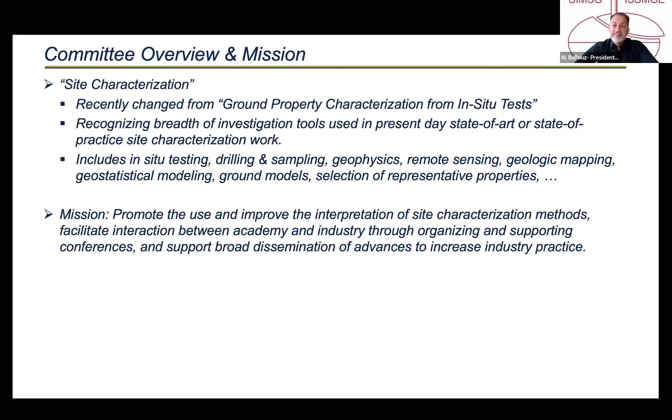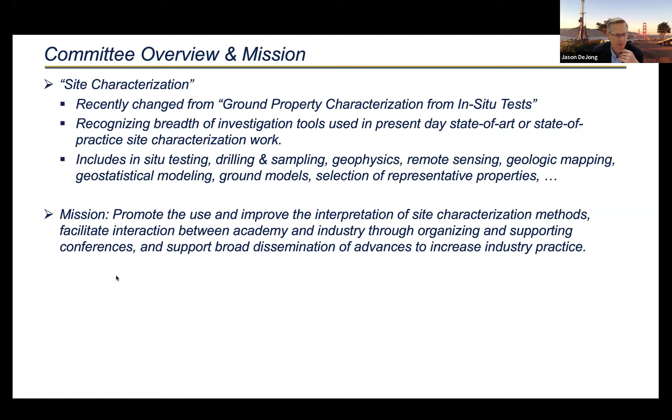So we're really trying to promote both the use and improve the interpretation of site characterization methods, facilitate interaction between academia and industry, and really try to push and provide access out into industry. I'm the chair of that committee, Paolo Monaco out of Italy is the vice chair, and Marcos is secretary. We have a number of members, 83, but we're always looking for more people who are willing and interested in being actively involved with our variety of activities.

Those activities are numerous, but I would say our committee is highlighted with respect to the number of meetings we help organize and host. Just a snapshot of some of those coming up: we've had two recently in the past year, there's a Measurement While Drilling conference, an online conference in a couple of weeks.

Obviously we're participating in the ICSMGE next June in Vienna. There's an In Situ conference in Bali later next year. The following year is CPT'27 in Vancouver, and the 8th International Conference of the ISC is going to be in Cape Town, South Africa in 2028. So there's a number of activities that provide opportunities for academics and industry to come together, share ideas, and collectively help advance the field.

I wanted to provide a comment and context about the selection of design values. Really, it's a critical component of developing a project-specific site model, developed based on site characterization tools. We need to understand the geologic formation process. We want to reflect best estimate values as well as a broad range, which is what we'll be talking about, and it needs to be a transparent process that's easily reviewable.

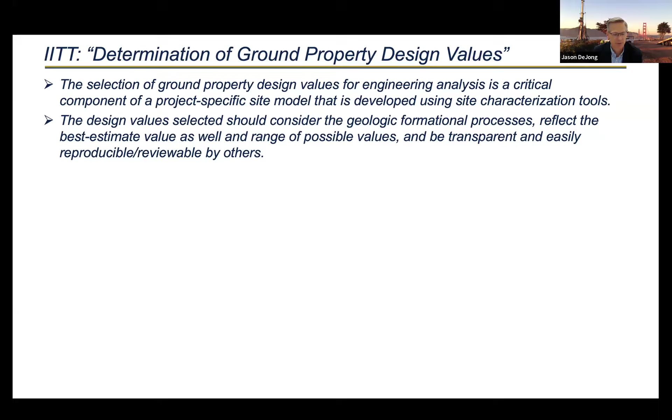So I like this figure from a project site where they're building an embankment dam. You can see here a vertical cut of about 10 meters, and what's beautiful about this is you can see all these thin layers and fingerings in all these different places of all these different soil types.

And if we did one sounding on the right-hand side and another sounding on the left-hand side, maybe we would encounter the same layer at this location over here on the left and over here on the right, and we might assume those were connected if we couldn't see in between. But in fact, they're not. The subsurface is tremendously variable due to its depositional process.

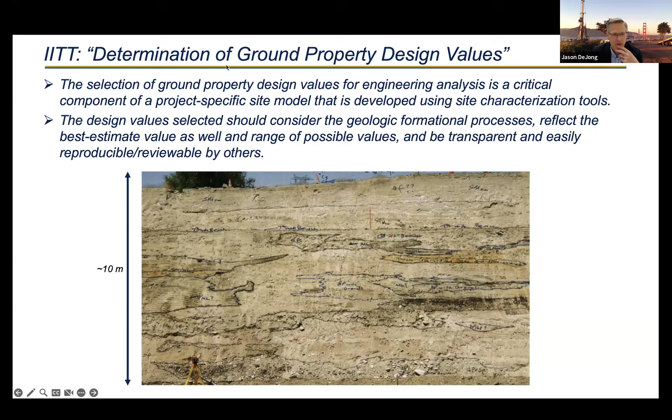So the question becomes, if this is what we're trying to design for, but we have very, very limited data, how do we do that? That's really the underlying question, the underlying theme about what we're trying to get a hold of and think about. So hopefully that sets the context a little bit. I'll pass it over to Jose, and feel free to take it from here as we begin to delve into the process to systematically select design values.

Okay, thank you, Jason, for this opportunity to share my experience with Eurocode. Let me share. Jason, that was very short and very powerful.

I have more slides. Scary at the same time with the section view. That's the reality, how much we don't know. We only sample. It's the first time somebody shows what we don't know instead of showing what we know. I like it. The question is, how much do we not know? We actually are over-optimistic, I think, in our understanding of the subsurface. The mystery is much greater.

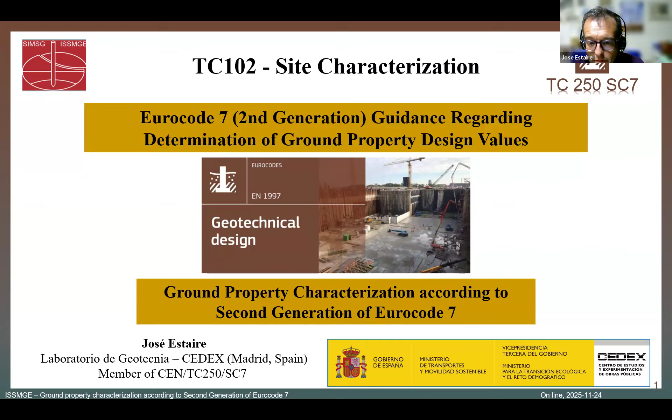Julia and I are going to show you what the second generation of Eurocode 7 says about this. Good afternoon, my presentation is about ground property characterization according to the second generation of Eurocode 7. Let me begin talking about the second line of the title, second generation of Eurocodes.

Eurocodes, for those that don't know, are a suite of 13 documents that establish principles and requirements for safety, serviceability, robustness, and durability for the design of buildings and civil engineering works. Among these documents, Eurocode 7 is the one devoted to geotechnical design.

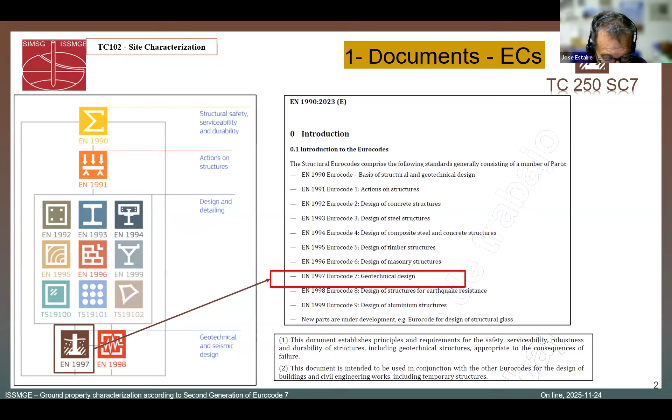The second generation of Eurocode 7 has 3 parts. Part 1 sets the general rules for the design and verification of geotechnical structures. Part 2, devoted to ground properties, gives provisions and guidance for planning ground investigations and sets rules for determining ground properties, mainly based on field investigations and laboratory tests. Part 3, geotechnical structures, provides specific rules for structures such as foundations, retaining structures, or even some new topics about ground improvement works.

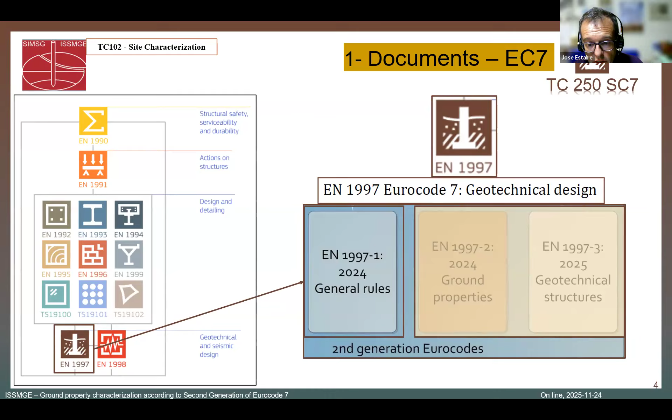Now let's focus our attention on Part 1, since part of its content is directly related to the topic of this seminar. In the following slides, we are digging into Part 1 to find the specific contents we want to explain. So let's begin with Part 1 and its table of contents, in which we can see clause 4, basis of design, devoted to the principles of this design.

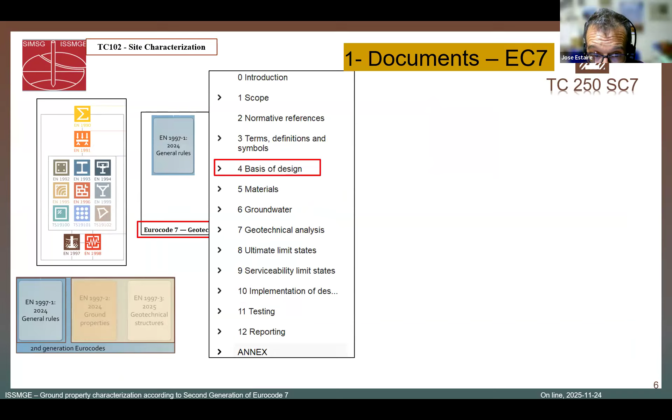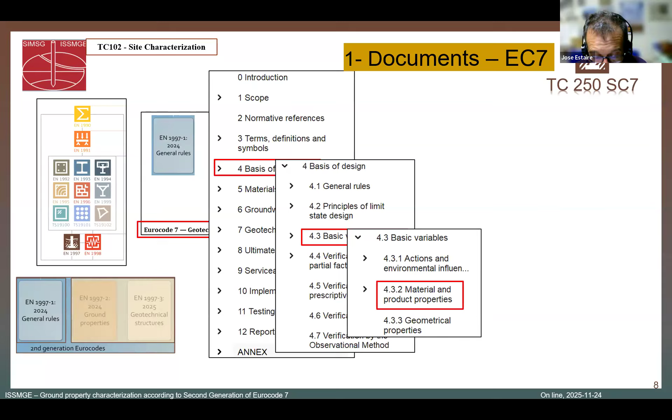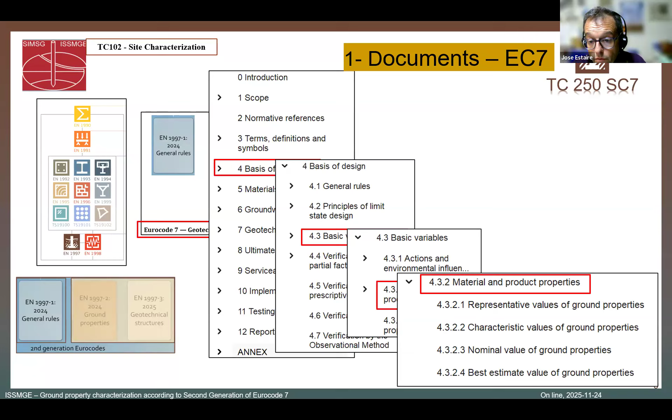And going on, section 4.3, basic variables, and finally we arrive at point 4.3.2, material and product properties, where we can find these paragraphs that describe different concepts about ground properties, representative values, characteristic values, and nominal values, which constitute the main topic of both Julia's and my presentations.

However, I don't want to lose the opportunity to present this JRC guideline, determination of representative values from derived values to verify limit states according to Eurocode 7, since it explains many of the concepts that Julia and I are going to develop during our presentations. It's a guideline edited by JRC, drafted by a group of people led by me, and where Julia plays a very important role.

It can be freely downloaded from the JRC webpage, and you can see here its table of contents. And here the relation between the content of this guideline and the previous point I mentioned. I have also added Annex A from Part 1 of Eurocode 7, characteristic value determination procedure, because it's very important for what Julia is going to explain later.

So now let's go to the core. Yes? Sorry to interrupt, but is this ongoing work or is it finalized? No, it's finalized. We have a final version of Eurocode, so yes.

People can open the link and see, use it for guidance. Yes, this guideline was finalized at the beginning of this year, after almost 2 years of work in this task group, and now it's finalized. I think it is very valuable to better understand what we are going to explain in these 10 minutes plus 10 minutes presentations of today. And was it done in an electronic format, application, or just a document PDF, just to tell everyone? Yeah, it's a PDF document, downloaded from the webpage. We will let ChatGPT go look at it. Yes, to make a summary of that. Yes.

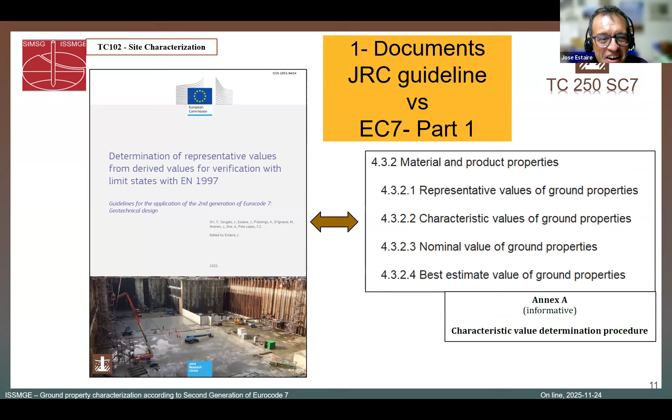Before entering the core of my presentation, I want to show you this little flowchart, because it's my interpretation of the process, the different tasks in the design of the geotechnical structure according to Eurocode 7. According to my understanding, this process has 5 main tasks.

Task 1: reliability assessment and management; ground investigation and modeling; design verification; design implementation during execution; and reporting. This is related to what Jason said previously about the transparency of the whole process. All these tasks have their own report in which the designer develops the work done during the design.

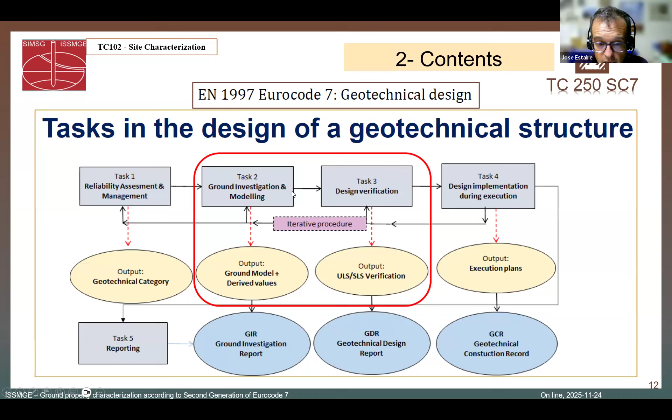What we are talking about today represents the last step of task 2 and the first step of task 3, design verification. So it's in the middle of these two tasks. That's why I put it here, only to frame the activities.

Let me begin by reading the first point I previously presented, because I think it's a good summary of what we are talking about. Representative values of ground properties, used in limit state verifications, shall be determined from derived values presented in the ground investigation report.

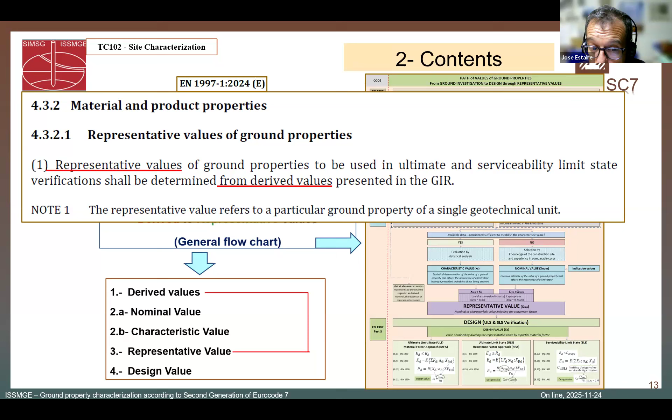That means that according to Eurocode 7, a value should follow a path from the moment it's taken during the ground investigation activities to the moment the designer uses that value in the design and verification of limit states.

This path can be summarized graphically in this flowchart, which goes from derived to representative values, from ground investigation to design, passing through another concept that I'm going to explain.

But before explaining this flowchart, I also want to read the note: the representative value refers to a particular ground property of a single geotechnical unit.

Think of a slope in which we have identified 2 or 3 layers, let's say geotechnical units, in terms of the vocabulary of Eurocode 7. If we want to perform an overall stability analysis, we need at least the cohesion, friction angle, and weight density of each of these layers. Each of these ground properties belongs to each of the geotechnical units.

So now let's go to the flowchart, beginning with the upper part. As usual in all geotechnical works, we begin with the ground investigation.

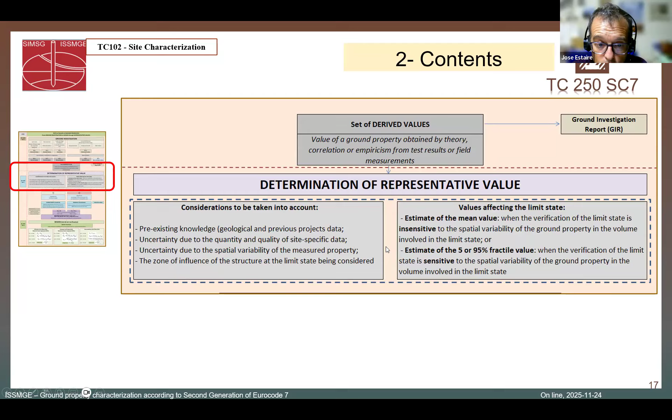Also, looking at the right part, the ratio between the spatial variability and the length of the surface is an indication of what value affects the limit state, as Julia is going to explain later. These two groups of ideas are very important in the determination of the representative values.

So now, coming back to our set of derived values, the designer has 2 paths to obtain the representative value. One is using statistics as a tool to calculate a value, termed the characteristic value, to distinguish it from the other path, in which the designer, instead of using statistics, uses engineering judgment as a tool to select.

In this case, it's a more subjective process than the other one. That's why we have preferred to use the verb 'select' instead of 'determine' or 'calculate'.

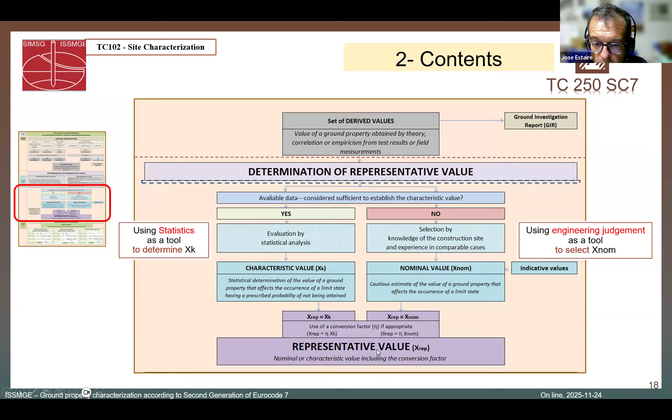The designers can also use both, as recommended in that JRC document. But in this moment, the designer has either the characteristic or the nominal value, or both, and it is in their hands to decide which representative value to consider. So the representative value is determined through these two ways or paths.

Now the last step is to use these representative values in the design process, in the limit state verifications. According to Eurocode 7, there are two approaches. In the material factor approach, the designer calculates the resistance using the design value, which is the representative value divided by a partial factor of materials. In the resistance factor approach, the resistance is calculated directly using the representative value, and then the calculated resistance is divided by a partial factor on resistance.

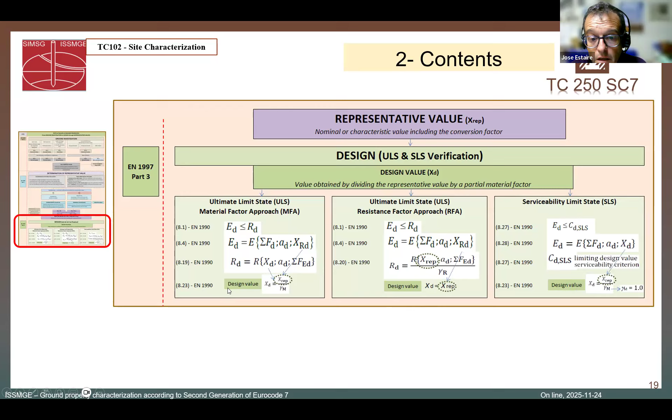If we are in the serviceability limit states, we use the design value directly, but in these cases the material factor is equal to 1. So this is the end of the procedure set in Eurocode 7 to determine the representative value and to use it in the design process.

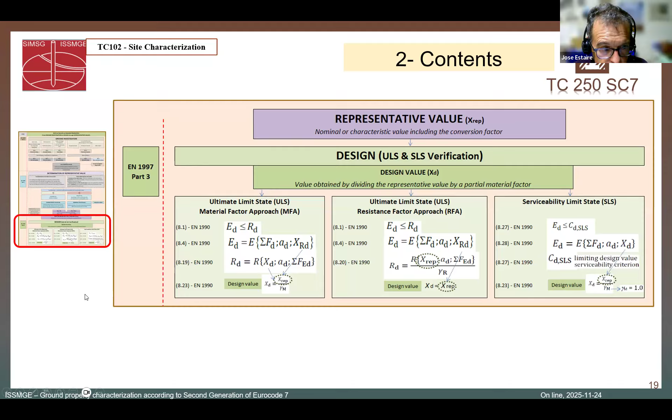Jose, can I just ask a couple questions? This flow chart on the left is really good. If you go back up a couple slides to where it covers the top part - I'm curious, in the guidance, is there clear delineation regarding the separation of what is factually generated in the laboratory or field versus the point where we really start exercising judgment?

In the case of trying to reconcile values, I follow through most of this, and you have to use some methodology to interpret the data - as you showed, going from a shear test to c' and φ'. If you're using CPT data, you can go through to QT, and that is a factual, mechanical equipment-based process of data reduction.

But then we have a choice, a step, in selecting strength values for a clay layer, and now I have several different correlations. At that point, when engineers start selecting, they're starting to insert judgment, because they're choosing between different correlations to try to estimate strength. As a reviewer, particularly on larger projects, it can be very important to separate where the facts by themselves end, and where you start inserting judgment, with documentation of that judgment and the justification behind it.

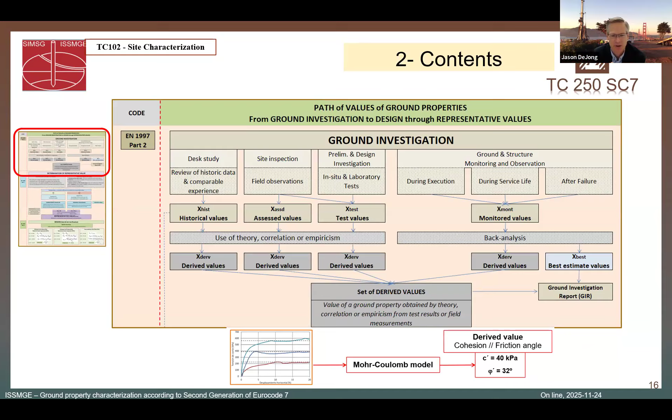So in peer review, or if every 5 or 10 years a critical structure has to be re-reviewed, you have great transparency of how that works. So I'm curious about your thoughts with respect to this in particular.

Let's say this upper part of the flow chart is very related to part 2 of Eurocode 7, the ground investigation. And when we jump from part 2 to part 1, it's where engineering judgment begins, although, as you mentioned, in the determination of the derived values there are also some theories or correlations used.

Some countries, according to another idea, according to this paragraph - you see that derived values are presented in the ground investigation report. The ground investigation report in some countries - Eurocode 7 now opens the possibility that for some countries the ground investigation report is factual, but for other countries it should have some interpretation. So it's not clear.

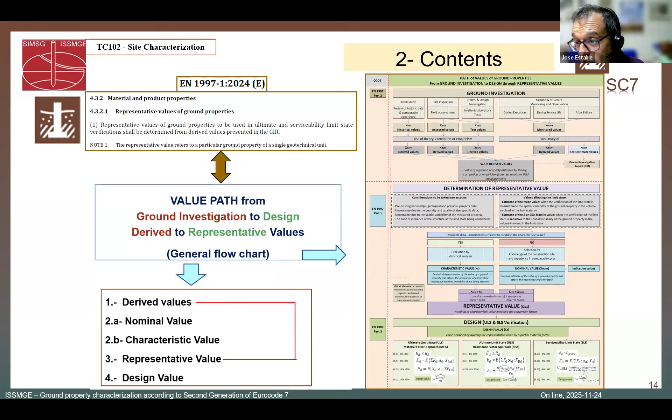Julia is going to talk about this, and also let me mention this guideline in chapter 5. We titled it special topics, but perhaps it's not so special. There is some section about how to determine the representative values when there are different sources of information.

Yeah, nice. Okay, thank you. We need many hours or many days to go through the details. Yeah, I know. This is excellent, though. This is guidance anyone can use anywhere.

This is a summary, Jose. Is there in the guidance some recommendation to store the data in a data format for future use, like AGS or other data formats? Does it mention anything about that? No, it's not mentioned in this guideline.

There is another guideline, one of a set of four guidelines, called ground modeling. In that guideline, there are some ideas about this, what you are saying. Let's keep going.

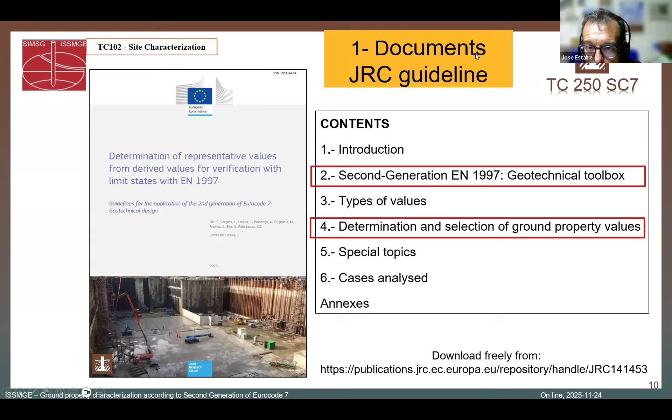Thank you. Thank you, Jose. Thank you. Go ahead. I'll stop sharing. Okay, so I guess it's on me to share now. The floor is yours, Julia.

All you need to do is teach us how to do all of it. That's it.

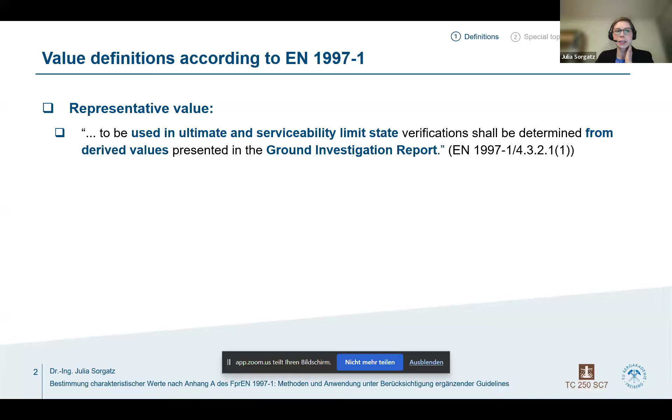I guess we'll dive a little bit deeper into Eurocode 7 part 1. As Jose already introduced, there are different types of values in Eurocode 7 part 1, and he already introduced the representative value, which is used in ultimate and serviceability limit state, and it's from the ground investigation report.

Then we have this nominal value, which is a value fixed on a non-statistical basis. That's the engineering judgment value, as you may remember. And it should be selected as a cautious estimate of the average, inferior or superior value.

But what's more interesting for us in the next few minutes is the characteristic value. This is derived based on a statistical determination of the value of a ground property. Now we're going to check how the statistics look like.

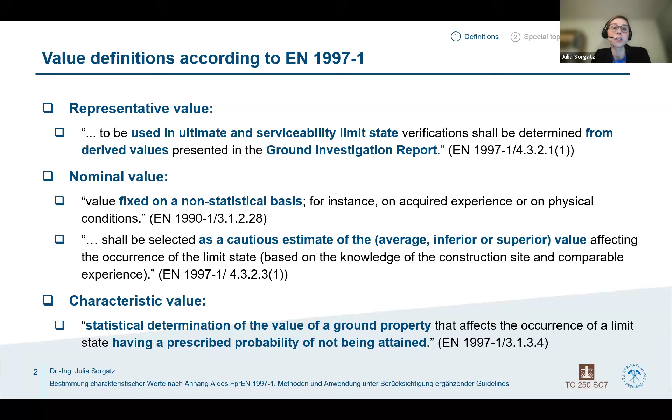And then we can calculate the characteristic value by using the mean value of all our ground properties. And then we have something that's called a statistical coefficient, the coefficient of variation, which is the standard deviation divided by the mean of our ground property.

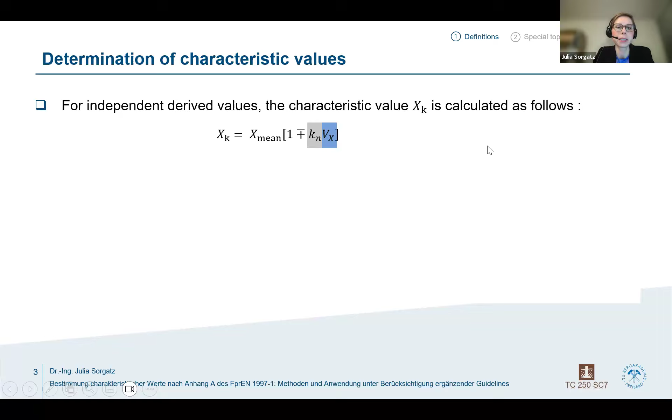Eurocode 7 makes things—I wouldn't say complicated, but you have to understand it once. There are different types of estimates, very much related to the averaging of the ground properties, but we'll come to that in a minute. So we have something called a type A estimate, and this is basically the estimate of a mean value.

And then we have something that's in between, something between the mean and the 5% fractile usually. There we have a very specific value, which is the large gamma squared, and this is a factor that accounts for the spatial averaging.

Then we also have two different cases: case 1 and case 2, which reflect our knowledge on the coefficient of variation. So Vx known and Vx assumed means we have some information on our variability in the ground, whereas case 2 means Vx unknown, so no knowledge on the variability of the ground.

In this case, we use the student T distribution for the Kn value instead of a Gaussian distribution. The student T distribution is a little bit more conservative, so it gives you, in the end, lower characteristic values.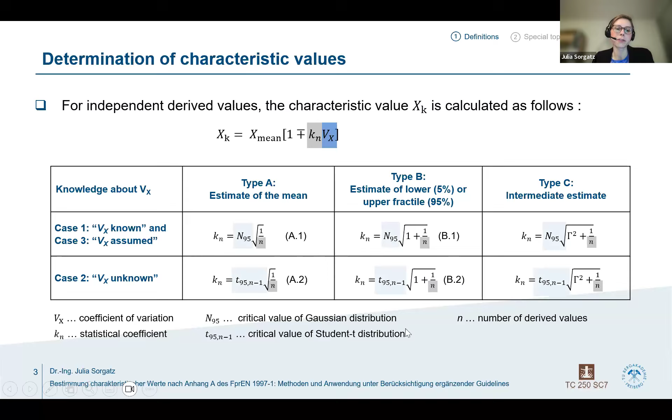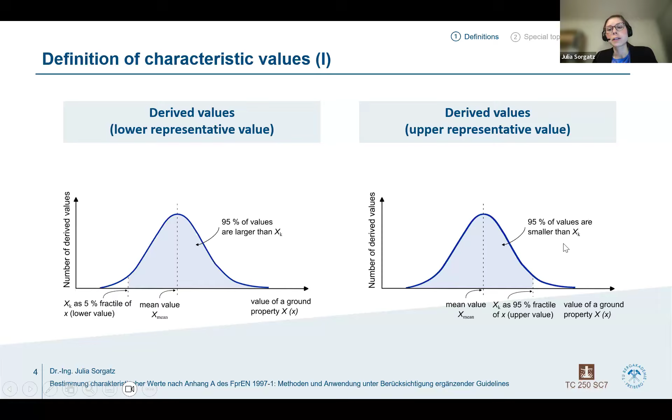So we have the different values as mentioned, and always the number of samples or derived values that needs to be included in our definition. To show what this means: here is our distribution of ground properties. When we have a 5% fractile value, a lower value, it means 95% of our values are larger than the characteristic value we determine with our equation. And if we have an upper characteristic value, then 95% of our values are smaller than it.

Then we have this spatial averaging concept. When we have a type A estimate, it means we are calculating the mean, and for that we need a lot of spatial averaging. The ground properties on our failure surface, as with the slope example, need to average out over the failure surface, so we get closer to the mean and our distribution gets smaller. This is the type A estimate.

Then we have the type B estimate, where we estimate the 5% fractiles. This is the pile example, where at the bottom of the pile there's only the tip, and there's not really a lot of averaging of the ground properties. So in this case, we would use the type B estimate.

Then we have the intermediate case, which is only described in the guideline that José just introduced, by TC1. The type C estimate means we do have spatial averaging, but it's not full spatial averaging that converges to the mean value. This is, for instance, relevant for strip foundations or foundations in general, where the type C estimate could be interesting.

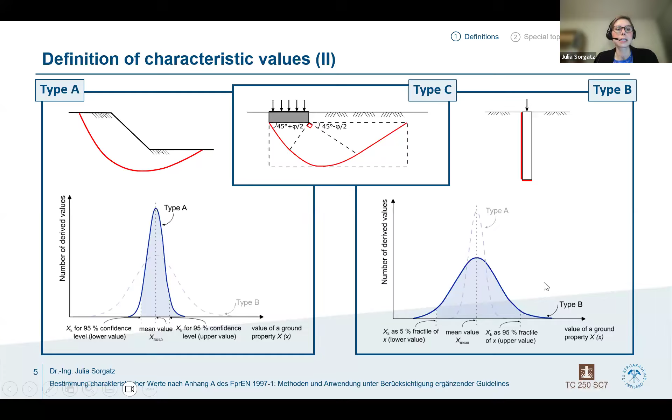We were also already talking a little bit about data, and the Eurocode itself says that when available data are considered sufficient to establish the characteristic value, then the representative value should be determined from this formula. Basically, if the engineer considers that he or she has a sufficient database, then the characteristic value is preferred. But the Eurocode doesn't say what sufficient means, so you have to decide on your own what sufficient data really means for you.

The guideline José introduced a few minutes ago tries to explain what sufficient means, and it also says there's no unique way to select the minimum number of samples, because it depends very much on your application and on the data. When you have a lot of variability in your data, you need more samples than when you have only little variability, and when you have the geotechnical structure in the higher geotechnical category, you also need more data than in the lower category.

But sufficiency doesn't only relate to the number of samples, which is what we would usually expect, it's also related to data quality. If you have triaxial tests, for instance, compared to CPT data, they are of higher quality, and it would be easier for you to define the characteristic value based on the triaxial test data.

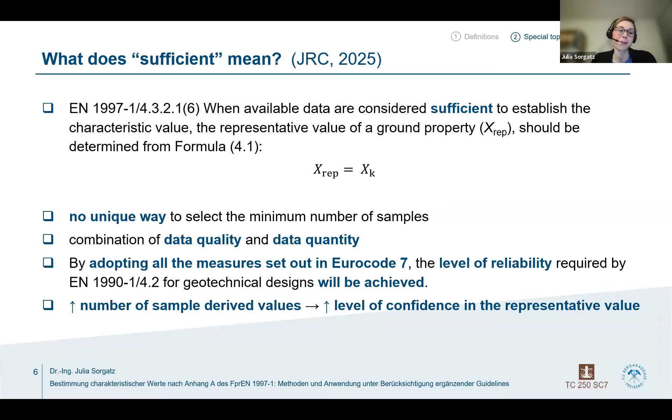The guideline itself tries to give you a little bit of guidance when it comes to the number of samples required, and there are different criteria for selecting the minimum number of samples. As you can see, there are quite a lot of different criteria. You don't have to look through all of them, but the engineer in the end has to decide which criteria would be applicable to his or her application. You can also see there are different numbers of samples involved, like a minimum, but there can be up to 12 samples or even 33 samples required to achieve the target looked into for a specific criterion.

But the guideline also provides examples for this kind of criteria, so you can check how it would work with your use case.

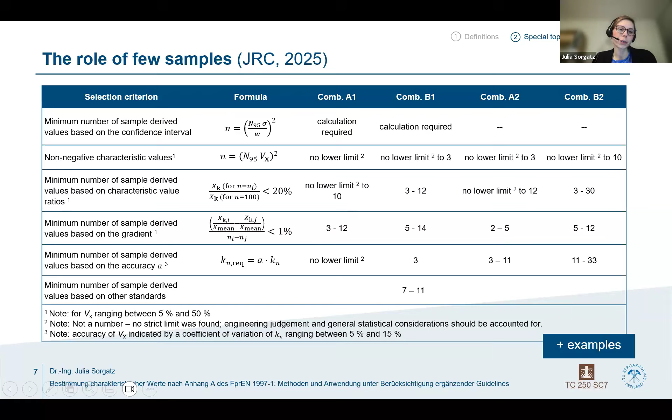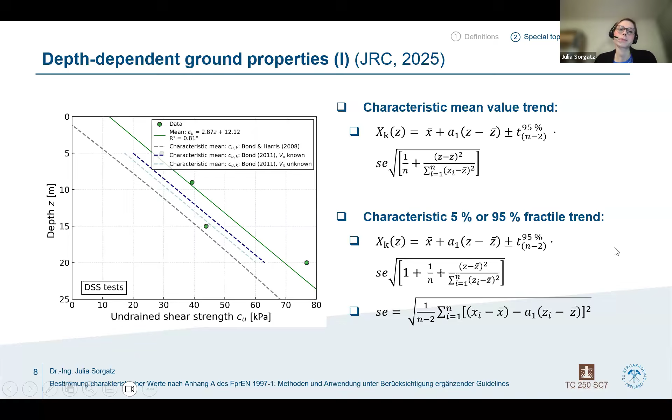Because I brought a lot of numbers, it might be a little difficult to pull up all of them. There's a small example we tried in Germany. It was also a publication with colleagues and me.

We had data from an engineering office with a number of shear tests - direct shear tests, 8 of them. Not a lot, but considering geotechnical engineering, 8 shear tests is still a lot, I would say. They used the data for planning a flood retention basin. For our calculations, we assumed a type A estimate because they rearranged and restructured the soil when they built the basin, so we assumed there was no correlation structure.

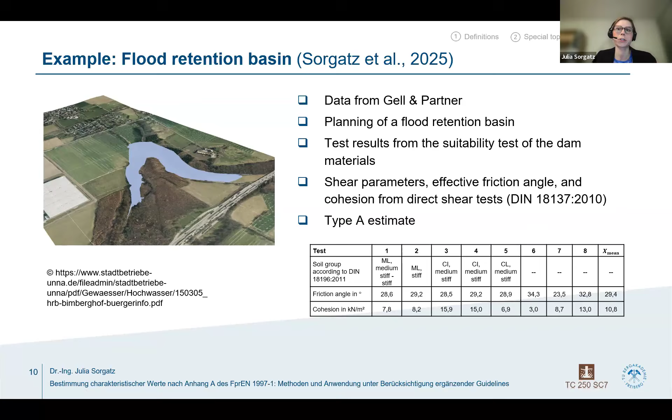In the Eurocode, in Annex A, you can find tables giving rough guidance on the Vx you could expect for your soil type. It's actually not related to soil type, but at least to the ground property. So you can look it up or calculate it from the data, as is done here.

We also compared it to the nominal values given by the engineers and provided for the design, and the values we calculated were quite close to the nominal values provided by the consultant.

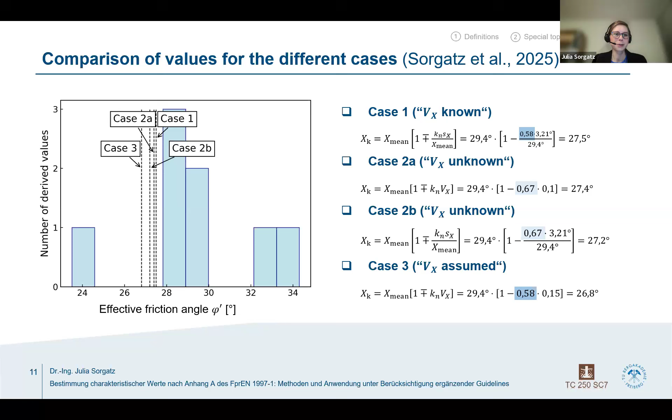So let's recap a few things. The nominal values, as introduced at the beginning, usually reflect many years of practical experience, but they are also determined on a limited number of samples. Usually we can deal quite well, due to our experience, with the uncertainty in the ground. But the statistical methods the new Eurocode, the 2nd generation, introduces allow for a more explicit quantification of uncertainty.

They also make understandable that sample size actually matters - the more samples you have, the better your estimate. You can also estimate how useful additional data can be, how it can help reduce the uncertainty in your data set. There are different documents supporting the determination of representative values, available on European level - the JRC reports - but often there are also national documents currently being worked on, so there will be a lot of guidance on how to select representative values.

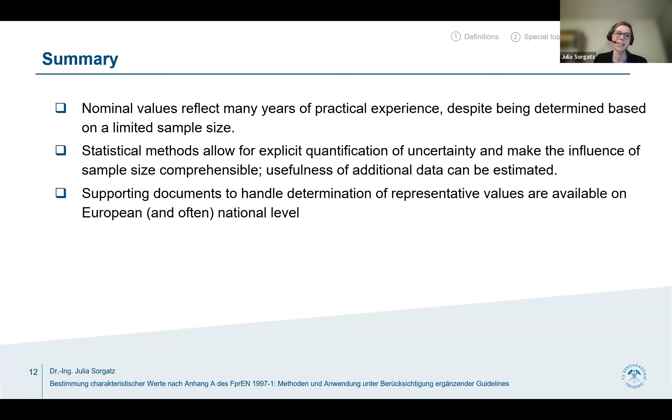I also have to add, since I've only touched a few topics, as Jose already said, the guideline has more information on depth and stress dependent properties, and it also shows how you can combine data from different sources in terms of a nominal value, but also in terms of characteristic and nominal values. So it's really worth having a look into it to get some ideas on how to combine data as well.

Finally, I also have to acknowledge the people who provided data for the example, because it's always a bit difficult to find someone with a lot of good data.

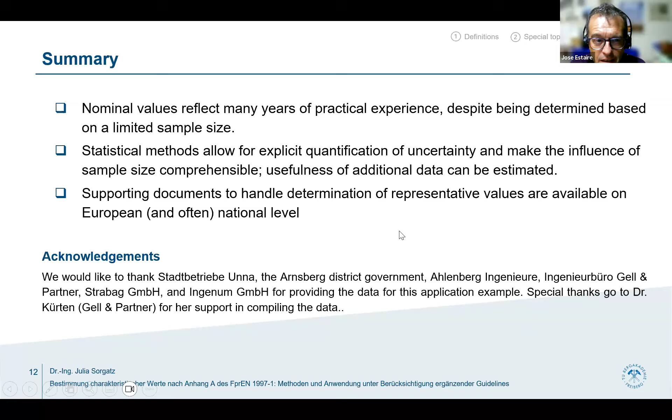I want to link the photograph that Jason showed previously, with these little fingers of different layers, with the ideas Julia showed about these two types of estimation, type A and type B. Because depending on what you are calculating, or depending on the limit state you are verifying, you must select one or the other, depending on the volume of the failure surface you are assuming. I think that's a way to answer what you mentioned during your presentation.

Let me say quickly what I would do, and then maybe open a door to discussion before giving the floor to Henry. In a remote area in Nigeria, when I'm faced with an embankment of a new highway and there isn't enough data, I run sensitivity analyses, though I don't know if it's in the Eurocode 7 recommendation, to see how much the data I'm looking for affects the results. When I find that one item is very important, let's say consolidation behavior, because of time, I ask for that kind of data so it becomes a known Vx. Is there guidance somewhere saying we should run sensitivity analysis instead of wasting time on a value that does not affect the final result of a design?

I'll also talk about how we use the DCPT to determine representative values and move those values to the points where we use them in analysis, maybe to calculate our bearing capacity and then settlement.

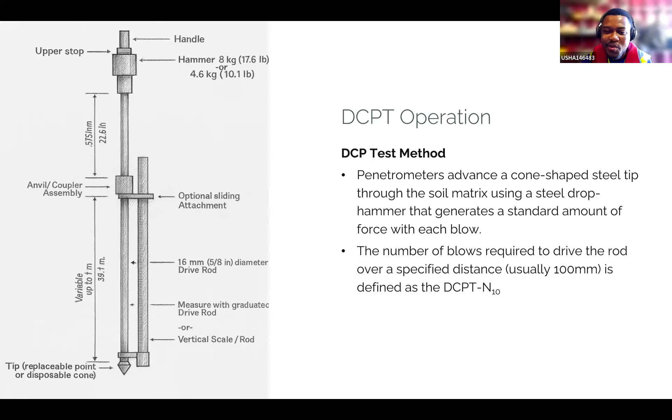Here I have a little sketch of the DCP and how it operates, using a standard hammer that drops over a specified distance. The number of blows required to drive the rod or cone into the ground over that specified distance gives the N value, similar to the SPT, but this is a lightweight one.

In Ghana, there are two main types that are typically used. We have the dual hammer, the 4.6 and the 8 kg, which we typically use for roads, pavements, and cases where we need greater resolution or sensitivity, or where the soil is more sensitive. We also have the 10 kg, popularly called the DIN, which is more used towards shallow foundation design due to the heavier hammer and its ability to go to deeper depths. We are able to drive it up to depths of up to 8 m below the surface.

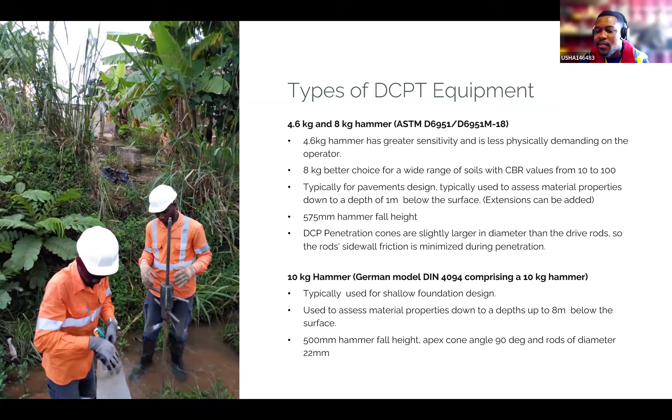Now, the reasons why the DCP is quite popular, and not maybe an SPT or some other type of testing: generally, the DCP is a very cheap or cost-effective means of measuring ground properties compared to other tests, such as running the SPT or even taking samples and running them in the laboratory. So most people would typically tend to go towards the DCP.

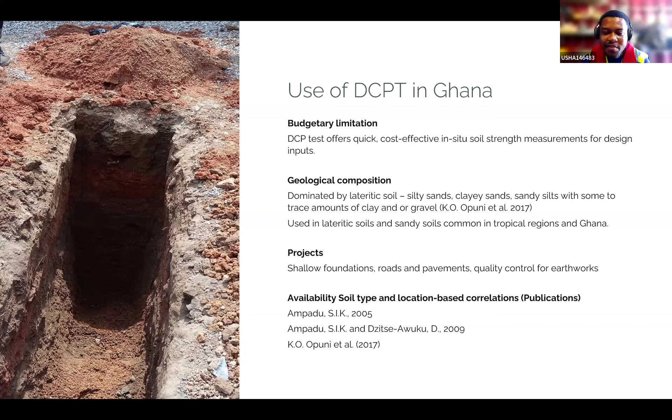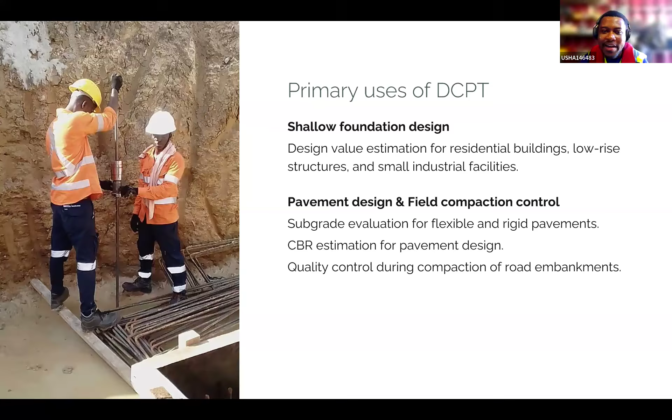So mainly, as I said earlier, it's used for shallow foundation design, pavement design, and field compaction control. Here a group of technicians are using it to assess the degree of compaction in the field, as you can see.

So typically we start from measuring field values, and it's important that you understand the type of foundation or job you are running and choose the right DCP tool. We want the tool to go to depths greater than a couple of feet beyond the depth or width of the foundations we are designing. So it's very important that you select the type of DCP with the depth range applicable for what you are doing.

The second stage has to do with deriving the subsurface properties, where we use the empirical correlations developed by our universities to move the measured values into either CBR, modulus, or friction angle, and then use those for design.

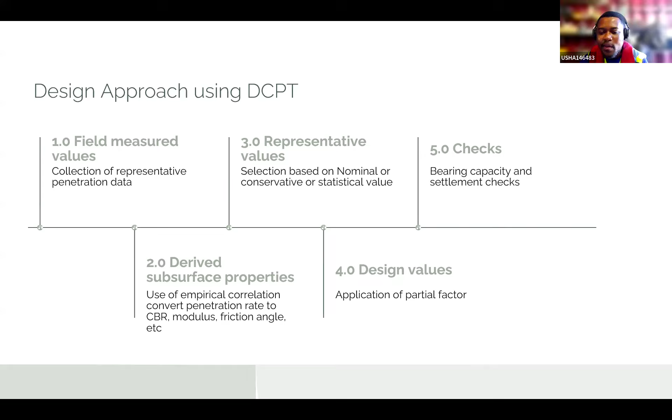The third step, in Ghana mostly, is more of a conservative selection of the representative value. Because the DCP doesn't bring out physical samples for you to actually see what's present, and doesn't take into consideration the moisture content, among other reasons, we mostly tend to stick with a conservative or nominal approach to selecting that representative value to use in design. Then we apply these factors and use those values for the final checks and design.

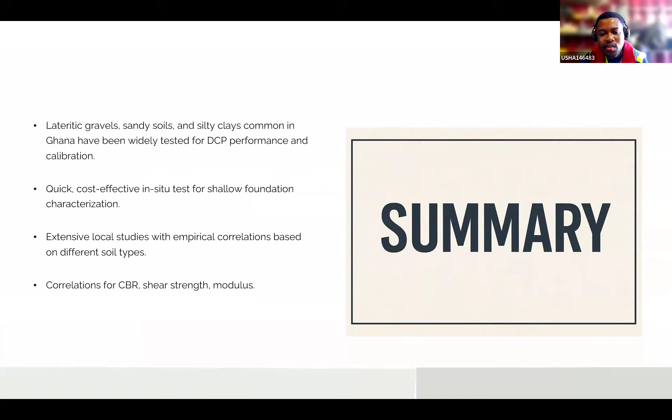So to summarize, I've tried to keep it really short. To summarize and why it's very popular, it's due to our soils, the cost associated with running the DCP in our setting, and the flexibility it gives engineers to be able to quickly mobilize to sites at lower cost. And then there's a lot of work that has been done that has various correlations that allow us to move the measured field values from that point all the way to using it for design.

I also wanted to list some limitations we have when using the DCP in design. The first has to do with the limited depth range it provides. For certain types of foundations, it may not be ideal because the influence area exceeds what the DCP can collect data for. Also, depending on the choice of DCP and the soil properties, you may not be able to adequately determine the composition of the soil. It just gives you some mechanical properties associated with the soil at that point.

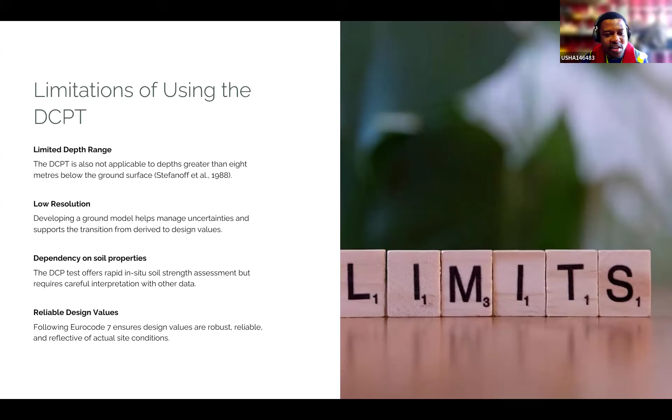And it doesn't provide a good ground model unless you pair it with other tests that allow you to excavate into the soil. And even with those, they are limited because most of the time you use manual labor to do that. The strong dependency on soil properties also influences the DCP. Sometimes the moisture content plays a role and is able to either increase or reduce the skin friction experienced. So these are some references on various works that have been done, and you can find correlations to move the results from the dynamic cone penetrometer and help you for design.

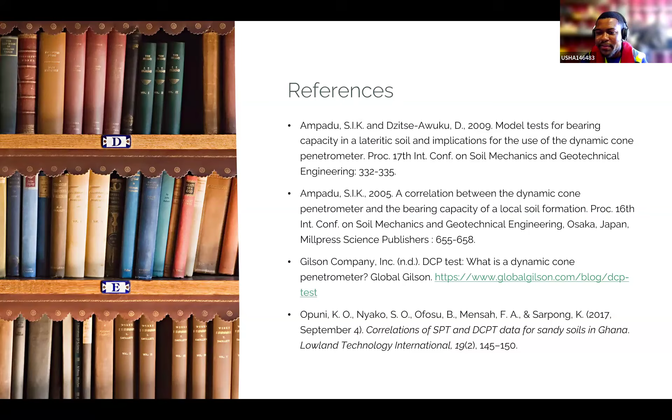Henry, thank you so much. You brought another example of one specific test. You put a spice to this presentation with photos from Ghana. I really like it. Well, in summary, my summary: the more data you use, the better.

So with the DCPT, you can get a lot of data and reduce the variability they were talking about, but also do more tests, predict the behavior, mode of failure, run sensitivity analysis. I'm giving recommendations to our viewers.